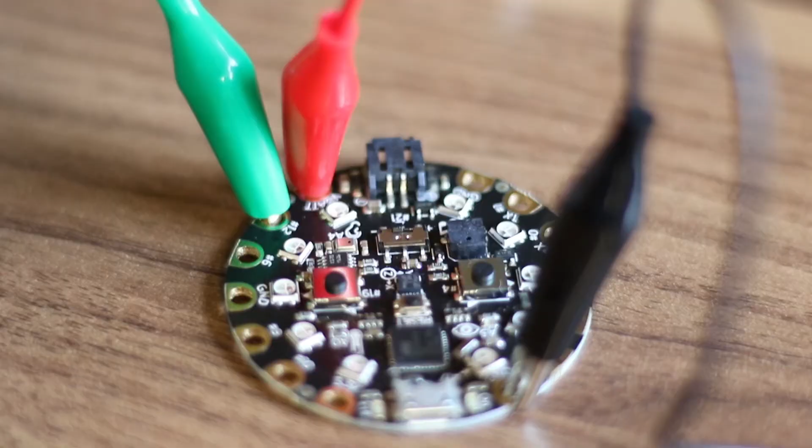As I mentioned, the Circuit Playground has these alligator clip friendly I/O pins that make it really convenient for rapid prototyping. For example, here's a project where I have the Circuit Playground, a servo motor, and a push button, and programmed it so that when I push the button, the LEDs turn green and the motor spins. When I release the button, the servo motor stops and the LEDs turn red.

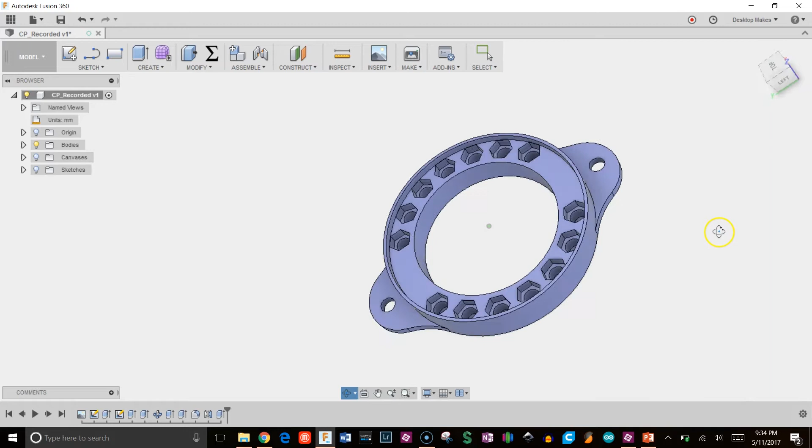So here's my dilemma. Basically, I want to be able to take my completed project to maker fairs and other events without having to worry about the wires coming apart or having to assemble it on site. So what I want is a more sturdy connection without having to solder the pins. Here's the solution I came up with. I used Fusion 360 to design this Circuit Playground screw terminal block, which allowed me to take my project from something that looked like this to something that looks like this. Sturdier connections and a lot tidier.

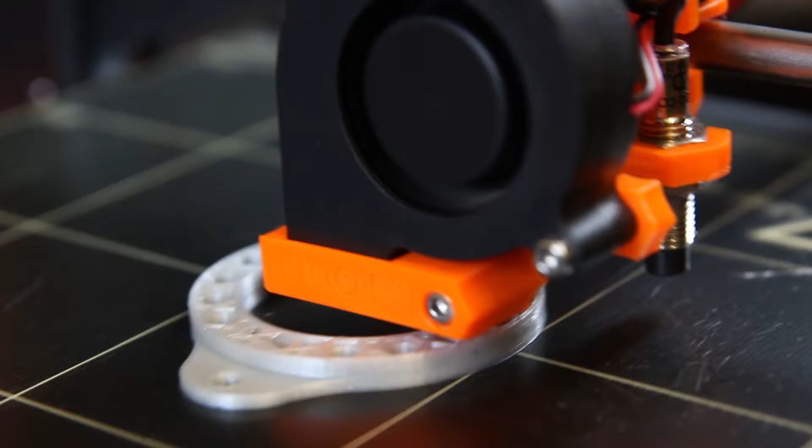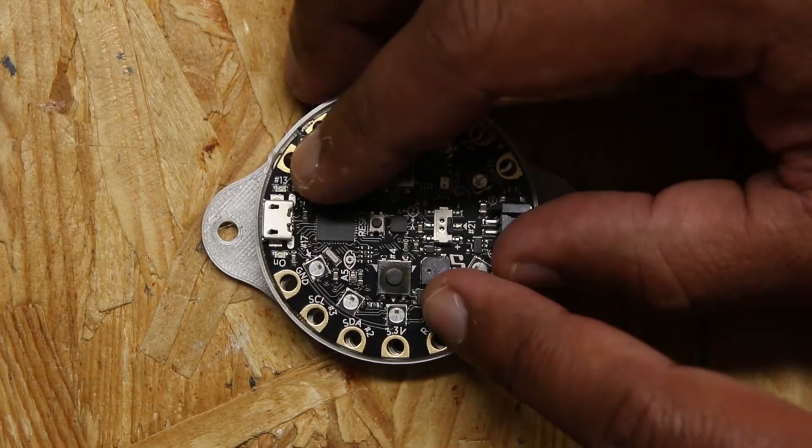After 3D printing my design, I went ahead and applied a little bit of CA glue and glued in some M3 nuts. Now you want to be careful with the glue there, only apply just a little bit so you're not getting any in the threads. And as you saw there, I only glued the 2 opposite corners, and the rest of these I went ahead and press fit them in. Then take your Circuit Playground, align it to the board, and go ahead and screw in those M3 screws. In my case here, I only screwed the ones that I glued in, which was the VBAT and ground.

Next, take your jumper wire and just curve it so you have a little hook. Attach it to your screw terminals and simply screw them in, and attach the other end to your breadboard or whatever it is you're hooking it up to. Once again, here is our original circuitry, and here is our new and improved version with our Circuit Playground screw terminal block. Okay, let's go ahead and jump into Fusion 360, where I'll show you step by step how to make your own Circuit Playground screw terminal block.

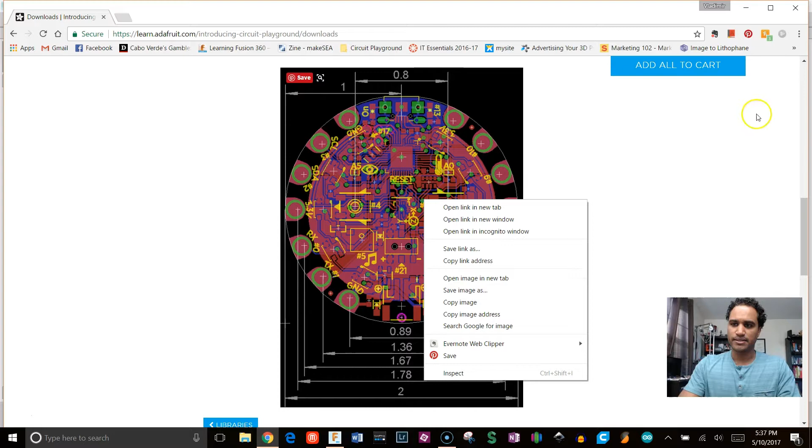So once you go ahead and click Save Image As, you can now go back to Fusion, go on Insert, Attach Canvas, and let's first go ahead and note the dialog box that pops up. So we're going to choose our face that we want to put that on. In this case, it's going to be this XY plane, or that green-red plane. So click on that and then click on Select Image. In my case, it downloaded to my Downloads folder, and I'm going to click on it, and you can see it brought it right in.

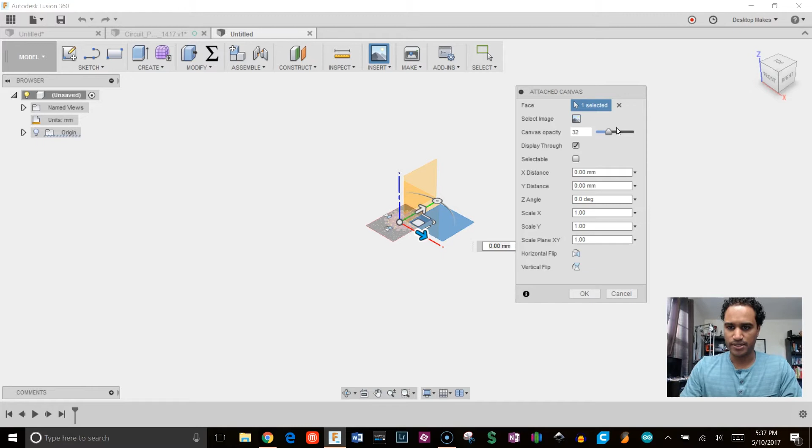So a couple more things we're going to do. One is to bring the opacity down to about 30 something, and that just allows us to be able to see through our canvas when we start sketching, and then make sure to click on Display Through. Click OK, and you can see our canvas is right in place, and then just click on the top view here of our view cube, and we'll rotate this so we are looking straight down on it.

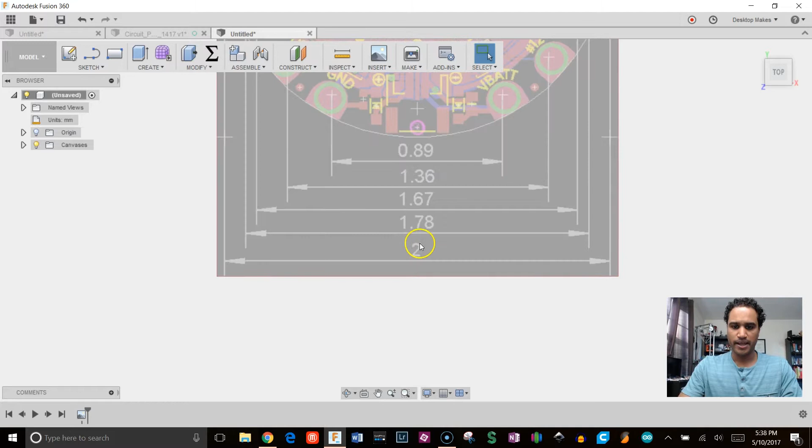Now, the nice thing about this is we can see that we have units right here. So there are two things we're going to do before we start sketching. And that's going to be one, to calibrate this, and two, to center it. So to calibrate it, we'll right click and expand canvases, click on our circuit playground image here, and choose calibrate.

Now, the beautiful thing with Fusion is, although we're working in millimeters and this is in inches, we don't have to worry about switching back and forth. We can simply go ahead and click on the two endpoints here between our measurements, and as long as we type what unit we want it in, Fusion will make that conversion for us.

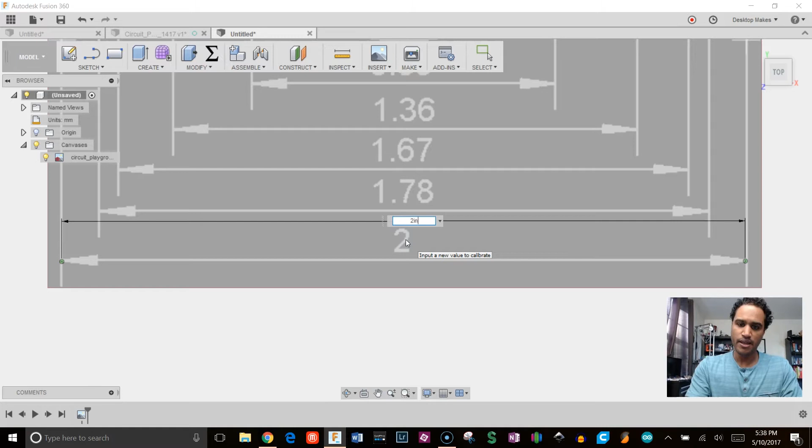So I'm gonna type 2 and just make sure I type inch. If you don't type inch, it's gonna think you want to work under your default units, which is millimeters. So just go ahead and type inch after 2, and this will be calibrated to 2 inches. Alright, let's go ahead and center this now.

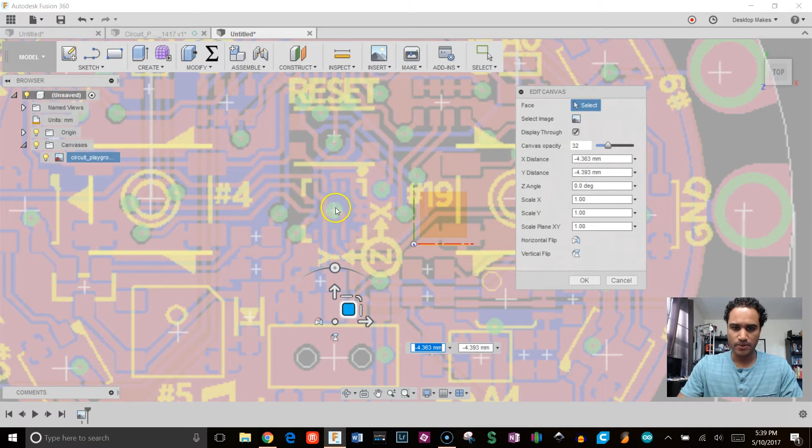So we'll toggle our origin on so we see it here, and then we're gonna right click on our canvas and go to edit canvas. We'll get our manipulator that allows us to move the canvas around. And what we're going to want to do is grab this so that the center, which is a little bit difficult to see, but you can see it between these 4 yellow brackets here, you have this little cross in the middle. Grab that and move it so that it's right in the center of our origin there.

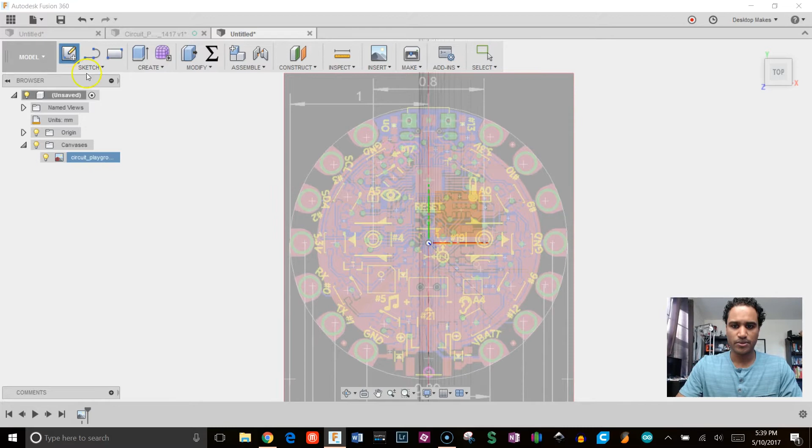So just go ahead and eyeball that and make sure you're zoomed in so you have a clear view, and then click OK. Alright, so we're centered, we're calibrated, so we're ready to begin sketching. So we'll go ahead and click on Create Sketch on our toolbar, and we'll choose our XY plane here.

And we're going to draw a circle from our origin. So we'll hit C for circle. We'll go to our origin and go out. We know that diameter is the 2 inches, so we'll go ahead and type that in again, 2 inch. Make sure to spell out inch and hit enter.

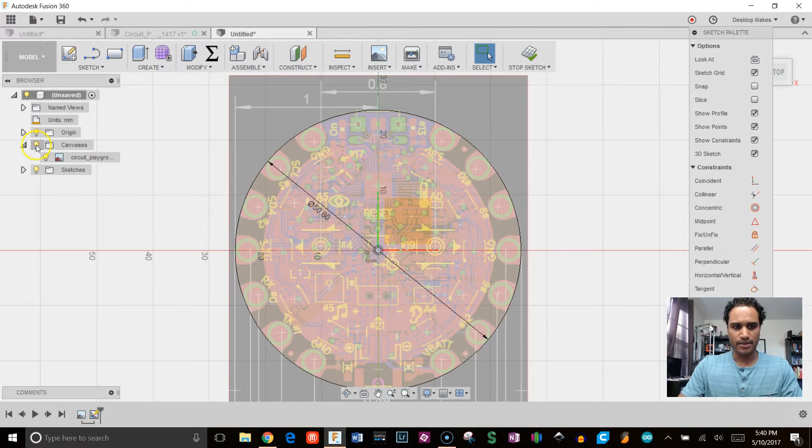And let's go ahead and get rid of that canvas for now. So we'll toggle that light bulb, and we have our 2 inch circle, or as you can see, it's 50.8 millimeters. Okay, so that's basically our outline of our circuit playground. So when we 3D print this, we want it to be actually a little bit bigger than that, so we can have a little wiggle room there, and we're not trying to really squeeze that in there.

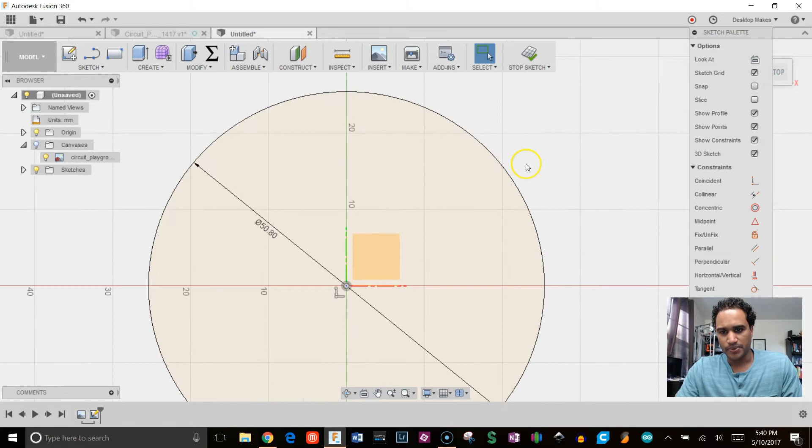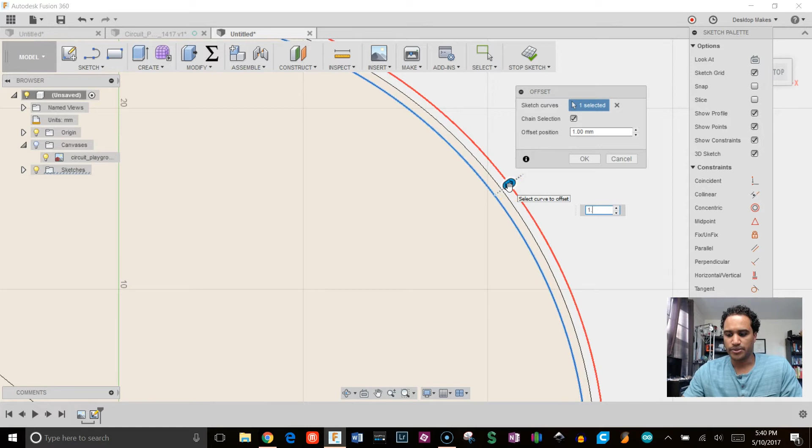So we'll do an offset. So we'll go to Sketch, Offset, and we'll click on that perimeter there, and we'll give it an offset of 0.5 millimeters. And then we're going to want to create a little border, so we'll do another offset. So we'll right click and do repeat offset, choose that original perimeter, and this time we're going to do 1.3 from that. And what that did is it gave us this edge here, which is 0.8 millimeters.

We can confirm that by inspecting and clicking on these two circles here, and we see that that's 0.8. And since I'm printing it with a 0.4 millimeter nozzle, that gives me a width that's 2 nozzle widths. So that works out. Next, I'm just going to click on that inner circle and hit X and make it a construction line. Okay, now I'm going to stop sketch, choose that inner circle, and extrude that up 7 millimeters to give me this cylinder.

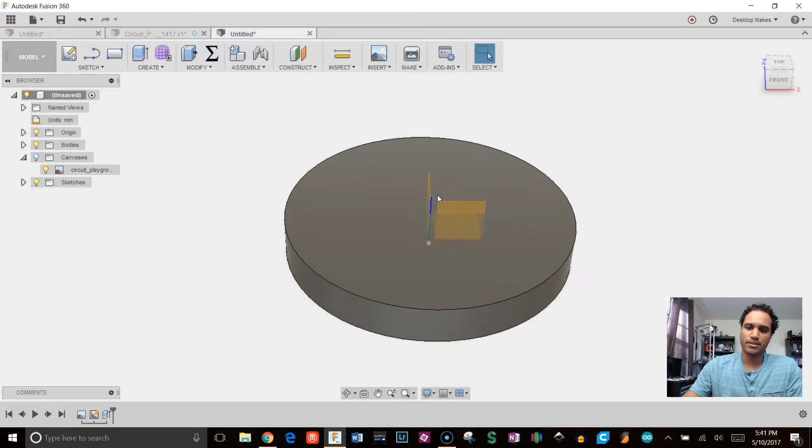And I'm going to create a sketch on top of that face and bring in that canvas again. And I want to now go ahead and create these circles here, which correspond to my pins on the circuit playground. So let's hit C for circle again, and I'm just going to eyeball this in place.

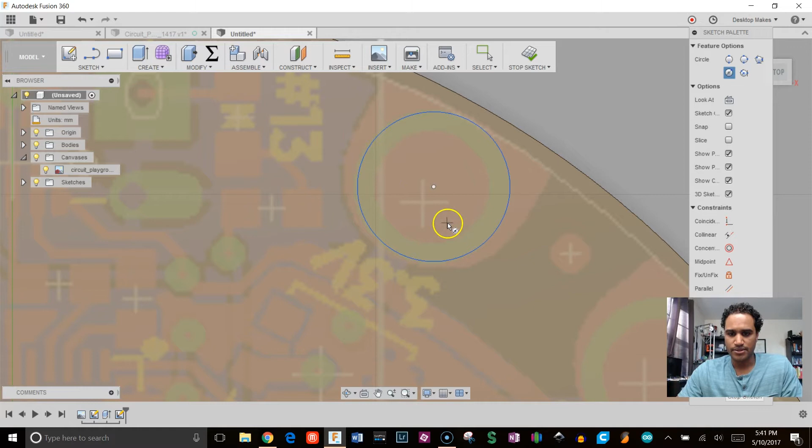And what I'm going after is that green circle. So I'm just going to kind of get it there, eyeball it into the center, hit D for dimension. Let's dimension this out to 4 millimeters and zoom out, and now we're going to want to dimension this from our origin. So D again for dimension, click on the origin and click on our center circle.

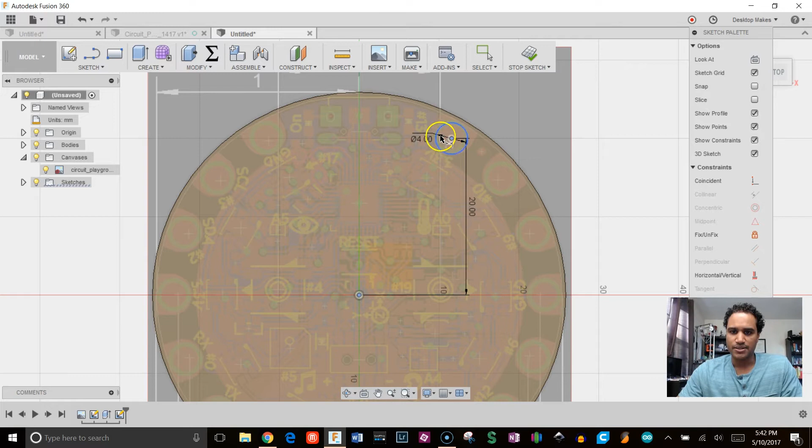I'm going to make this vertical dimension of 20 millimeters, D again, and then this time I'm going to put in a horizontal dimension. And so I want to click between those 2 points, and this time I'm going to do 11.5, and that's going to constrain that in place, so now I can't move this at all. So now that I have one circle in place, what we're going to do is create a circular pattern to make the rest of them.

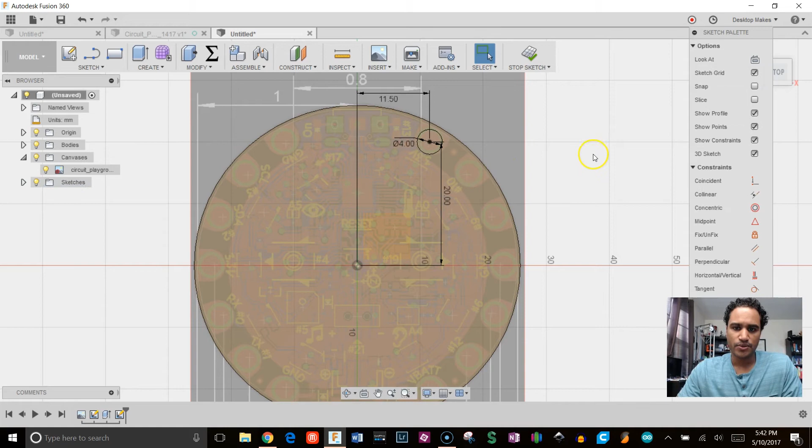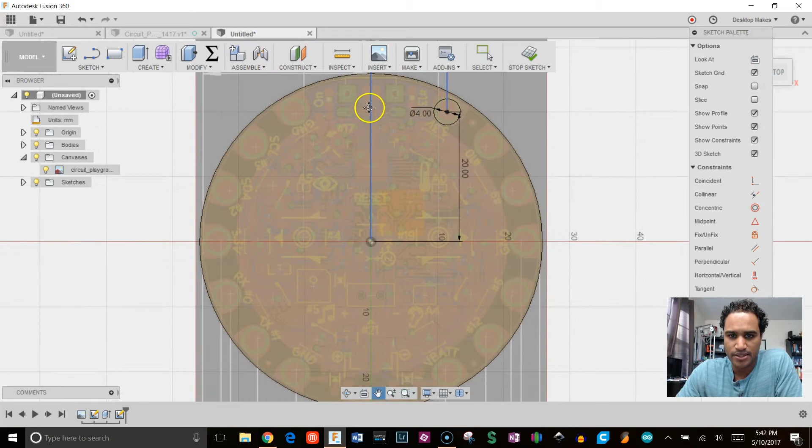And to do that, we're going to note that we have 7 circles on one side and 7 on the other side. But the way we're going to approach this is to think about it a little bit differently. So notice that if that pattern was to continue, what really we're missing are the 2 circles that would have fallen in between the left and the right side. So 2 on the top and 2 on the bottom. So knowing that means we would have had 7 on one side, 7 on the other side, so 14. It would have been 15, 16, 17, 18 circles in total. So let's go ahead and make this with 18 circles.

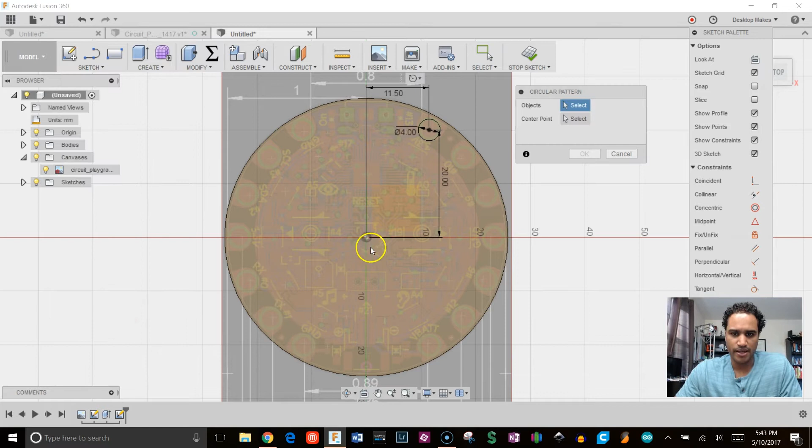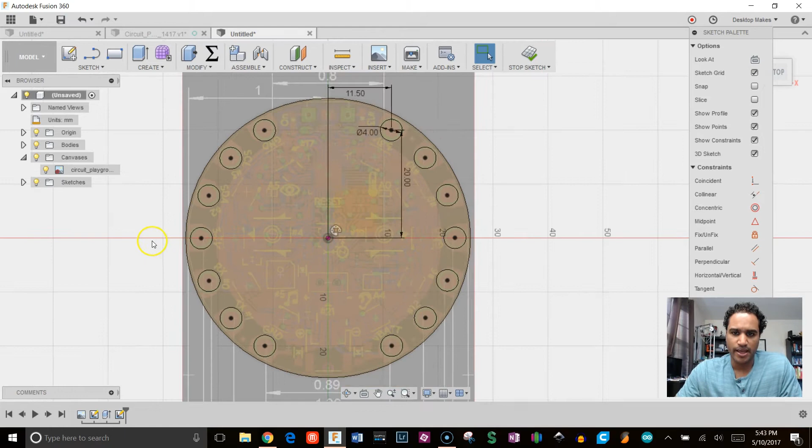So we'll go to Sketch, go down to Circular Pattern, choose our circle, our center point. Go ahead and click on the origin and quantity. We're going to choose 18. But now we can actually go in and uncheck these circles that we don't really need. So by suppressing those, we'll get the exact pattern that we have there. So we'll click OK, and we can see that our circles match exactly what we have. So we can click Stop Sketch now. I don't need to see that canvas again, so we'll suppress it.

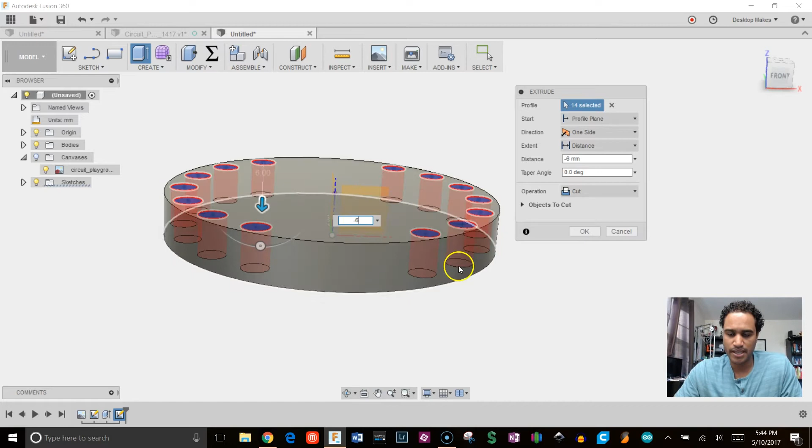E for Extrude, and we'll go ahead and select each one of these profiles. And we'll take that arrow, drop it down. We're going to go down -6 millimeters, which will leave us 1 millimeter of material on that bottom there. Make sure it's set to cut and click OK. Alright, now we're going to go back to that sketch. So go down to your timeline here and double click on that sketch.

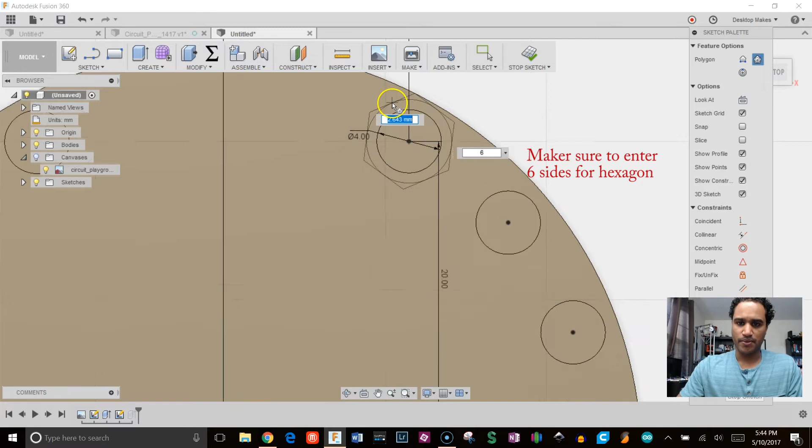And next we're going to go ahead and make our insets for our hex nuts. So we're going to click on Create. Actually, we're going to go to Sketch, go down to Polygon, circumscribed polygon. We'll grab our origin of this original circle here, come out to draw a polygon, and then let's dimension this from this edge to this edge. We'll make this 5.5 millimeters. That's because I measured the hex nuts I'm using. It's 5.4. I'm going to make it just a little bit bigger, so at 5.5.

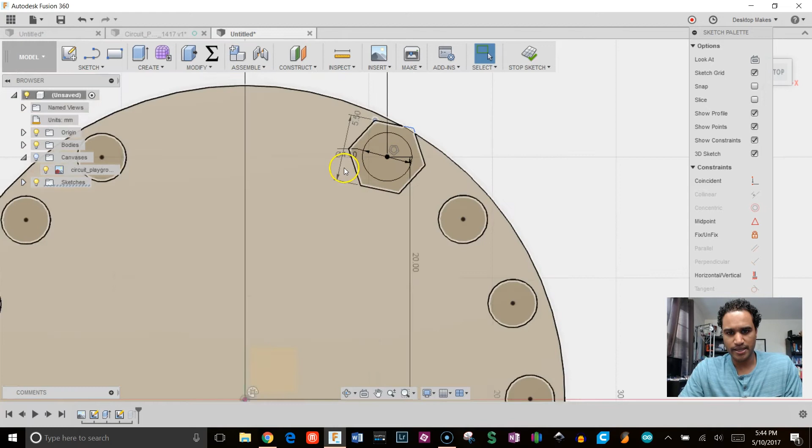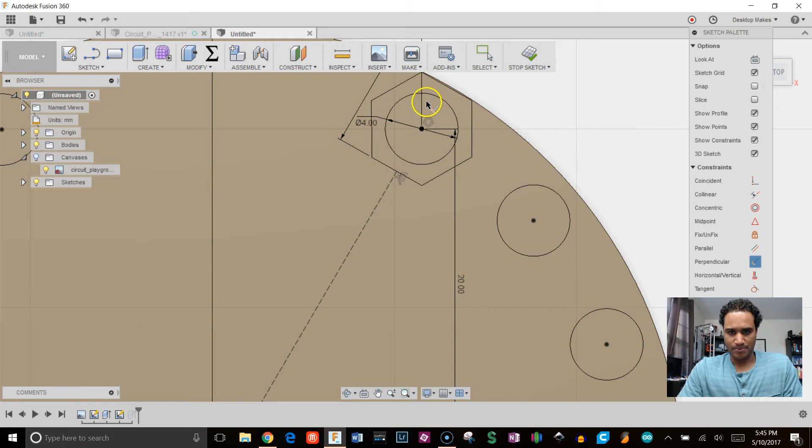So I'm just going to grab this and actually turn it a little bit this way, and then I'm going to draw a line from the center to the midpoint of this edge here. Notice we get that triangle there showing us that that's the midpoint. Grab that line and make it a construction line by hitting X, and then I'm going to grab a perpendicular constraint between that line and this edge, and that's going to snap that polygon so that it's now perpendicular to this line. Okay, we're going to stop sketch.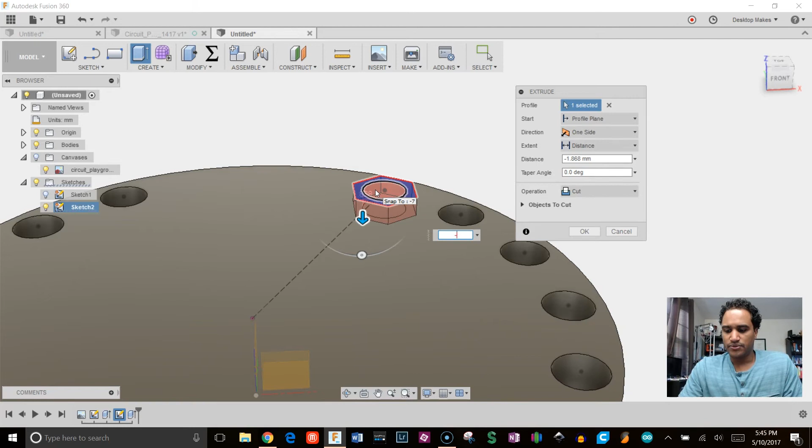Let's bring our sketch back in because it untoggled. And then we're going to hit E for extrude, grab that profile, bring it down. I'm going to do -2.6 millimeters. The thickness of the nut I'm actually using is 2.3. I just want to make sure that it's going to be completely inset in there.

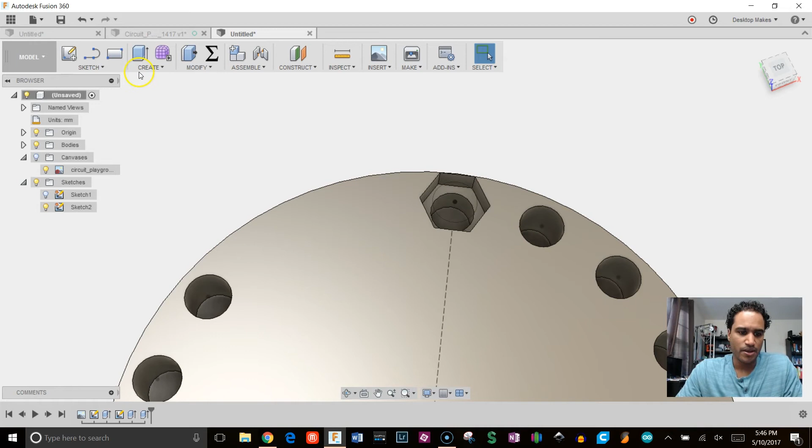Okay, so now we're going to create another circular pattern, but this time we're actually going to do it in the modeling environment and not in the sketching environment. So we're going to go ahead and go to Create, Pattern, Circular Pattern. Pattern type is going to be Features, and we're going to select it from our timeline. So we'll select that last extrusion that we did. The axis, we'll just go ahead and choose that outer perimeter of our circle. Quantity is going to be 18.

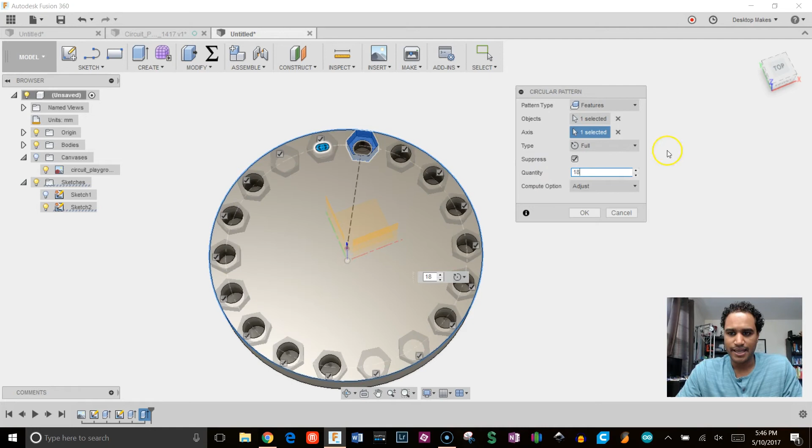And again, we're going to do the same thing where we're just going to go ahead and suppress these top 2 and bottom 2 extrusions, and then click OK. And we can see that we have our 18 hex circular pattern. The nice thing about doing it in a modeling environment instead of back in the sketching environment is that you don't have to make a million selections. You do it once and then just create your circular pattern.

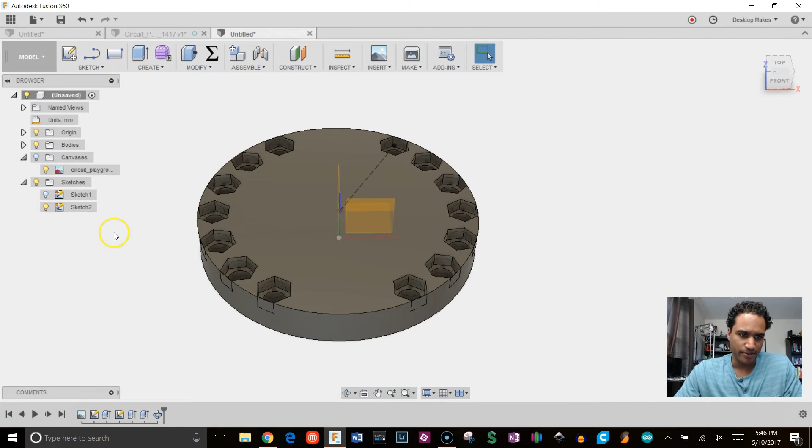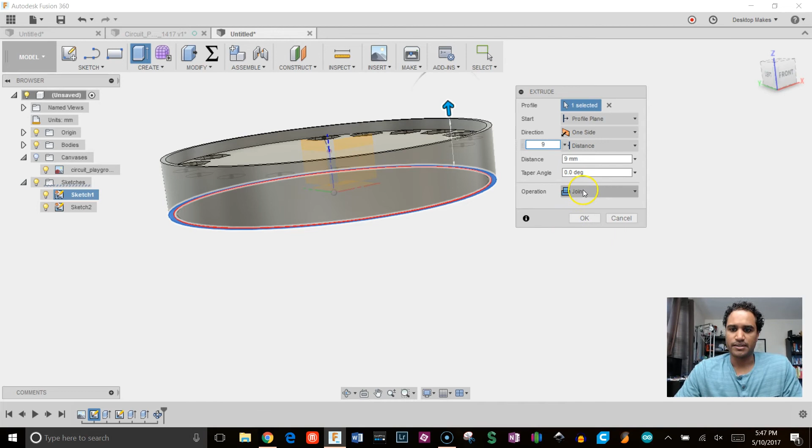Okay, so let's go back now to that sketch. We'll turn it on, that first sketch that we did. Remember, we created this outer rim here. So let's extrude that up. So we'll hit E for extrude, select just that outer profile there, bring it up, and I want it to go up 2 millimeters past our top here. So if you remember, that first extrusion was 7 millimeters, so this one we're going to go 9, and we're going to make sure it's set to join as the operation and click OK.

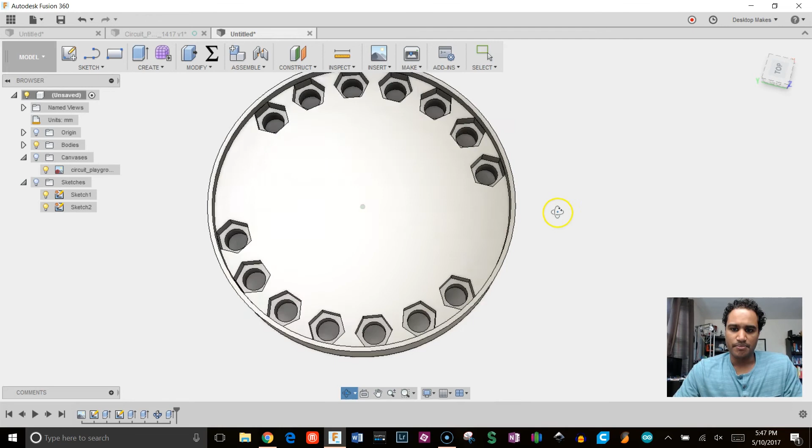Alright, so let's clean this up a bit by getting rid of the sketches here and getting rid of that origin. And there, we are almost there. A couple more things we need. Let's go ahead and make some little mounting brackets here on the side. So to do that, let's go ahead and turn it to this orientation here. And let's go back to that first sketch, because remember that first sketch is on this bottom plane here.

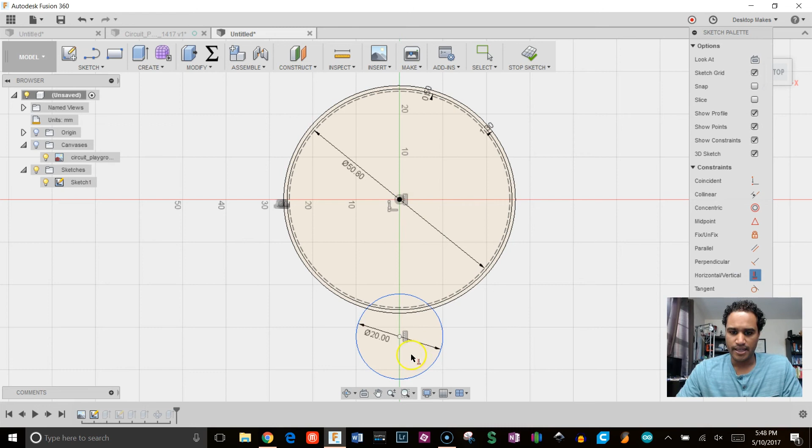So I'm going to click on that, C for circle. I'm just going to draw a circle somewhere here, make it 20 millimeters, hit enter. And I'm going to go ahead and constrain this. So I'm going to grab a horizontal/vertical constraint. Constrain that between the center of the circle and the origin here. And then I'm just going to hit escape and just drag this up until it snaps right to the outer edge. And go ahead and draw another circle here.

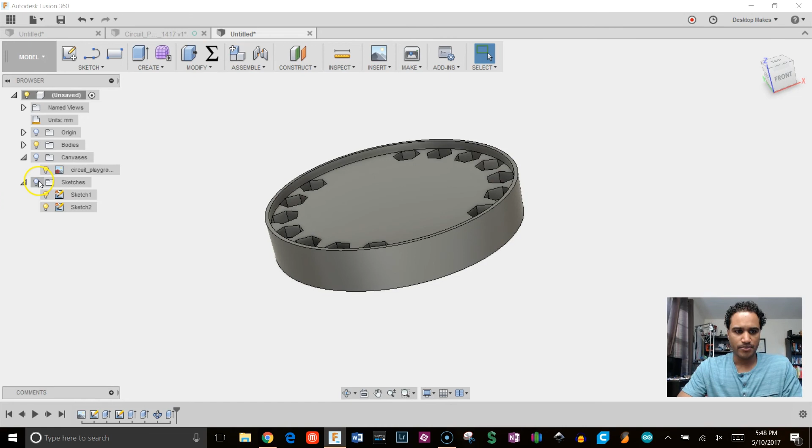I'll make this 4 millimeters. And again, I'll constrain this to the origin here. And I'm going to dimension this. D for dimension. I'm going to make this 5 millimeters from this top edge. Okay, now I'm going to hit stop sketch. Make sure I bring that sketch back into view. E for extrude. Grab that profile. Bring it up 2 millimeters. Hit enter. And then F for fillet.

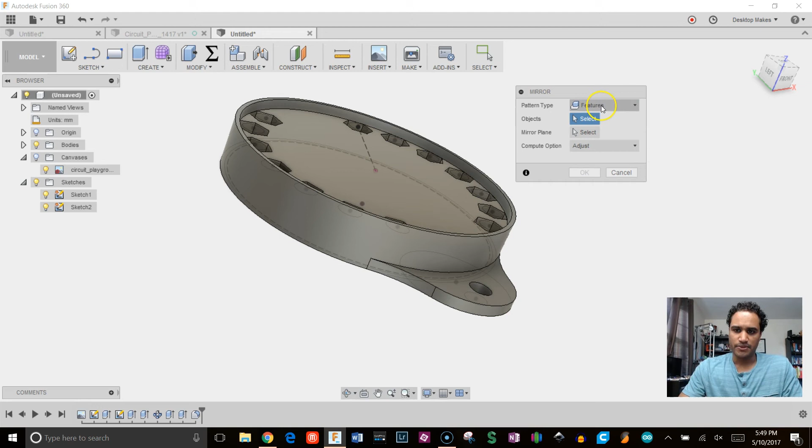And I'm going to fillet this out. I'll fillet about 20 millimeters, give me a nice taper there. And instead of doing it on the other side, I'm just going to go ahead and create a mirror. So I'm going to go to create mirror. Pattern type is going to be features. Object, I'm going to select it from my timeline. In this case, I'm going to select both the extrusion and that fillet.

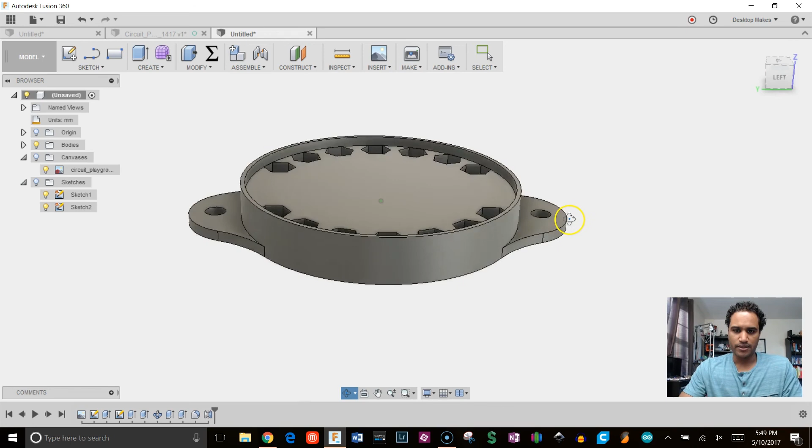Click on mirror plane, and I'm going to select this plane here, so that blue, red, or ZX plane. And you'll see a preview of what that's going to look like. So just click OK. Let's untoggle sketches there, and we can see that that's looking good. The next thing I'm going to do, and the final thing, is to get rid of a bunch of the middle here, because it's really just going to be wasted material, and it's just going to take longer to print. There's no reason we need to actually print the center part of this.

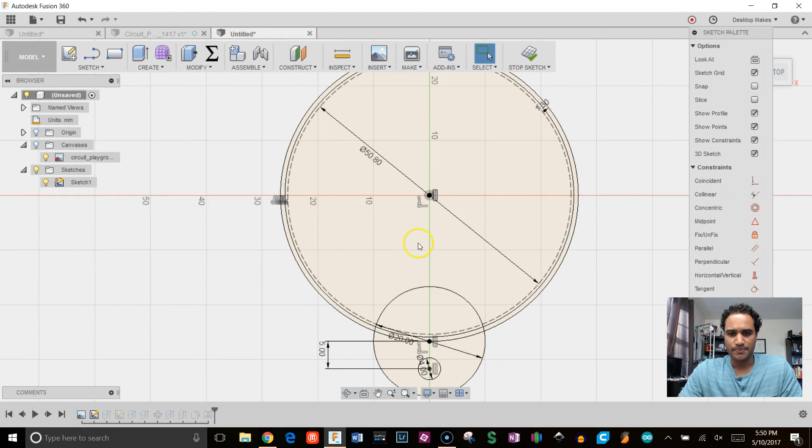So let's go back again to that first sketch. So here on the timeline, I'm going to go ahead and draw a circle. I'm going to make this, you know what, let's escape out of there. I don't want to do it on that sketch. Let's make it on the top sketch here. So double click on that, C for circle, make that 38, hit enter, stop sketch.

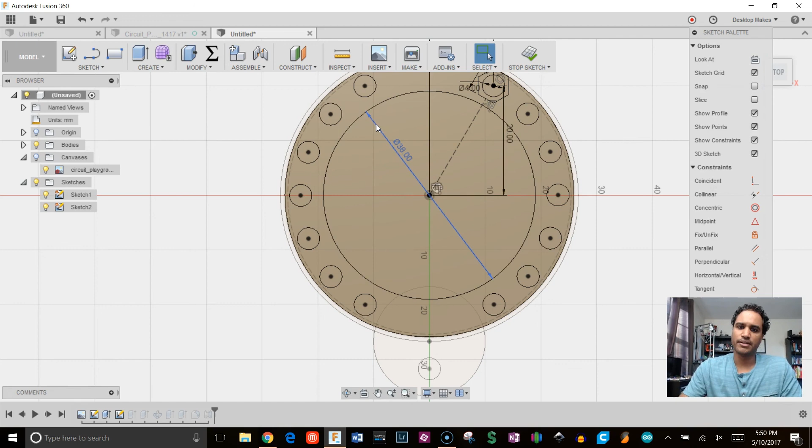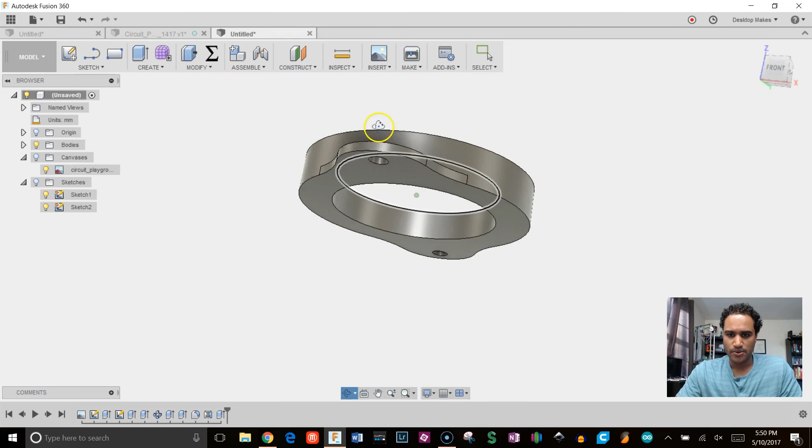Bring it into view by clicking our light bulb, select it, E for extrude, and then we'll bring this down. Distance will go all the way through, and then click OK, and there we go. So get rid of sketches here, and that's everything. So now we can go ahead and print this out, and we'll have a nice little holder for our Circuit Playground, which will serve as a nice terminal block.